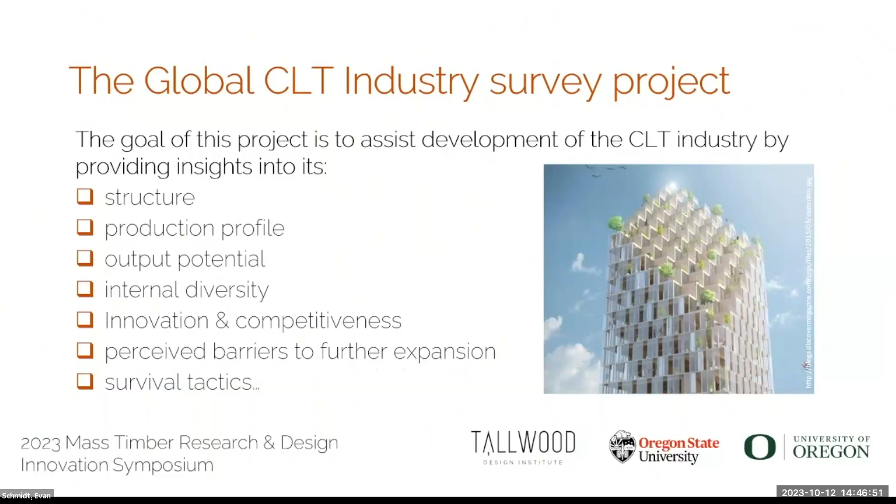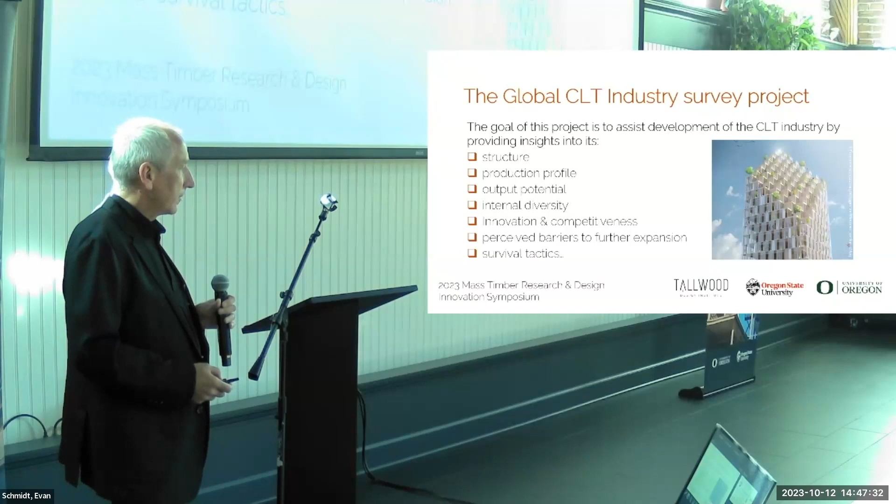Generally, we believe one of the best services we can do for our local North American mass timber panel industry is to look elsewhere—not only Central Europe, where all of this started, but also other developing markets—and see how they cope with challenges. This is an important context to everything discussed here before, because this is the industry that produces all of these panels and buildings, and essentially develops and collaborates with you on new exciting stuff and projects. So we collect all kinds of data, starting from industry gossip columns, trade journals, surveys, site visits, and we generate lots of data.

I'm not going to go through all of this here—it would take more than three times what I'm allowed. It's been funded; the TDI funding has been leveraged, and we've obtained funding from other sources as well, at times in kind, just travel money, at times other stuff.

I hope this is visible—oh goodness, not enough light in here. What you should see is, in gray, just contours of continents that you don't see. I leave it to your imagination.

We roughly divide the world into CLT producing regions. This is because not all companies wish to be singled out by saying this company produces that much. If we aggregate this data by region, it's much easier for them to share data with us, and that way we have a blanket policy—we never trace the data, and we never present it in any form that can be traced to an individual company.

As you can see, we have Central Europe separated from the rest of Europe, because Central Europe is the epicenter—about 80% by volume of CLT is produced there, or rather projects, because all CLT is produced for specific projects. It's a specialty product, not a commodity, okay?

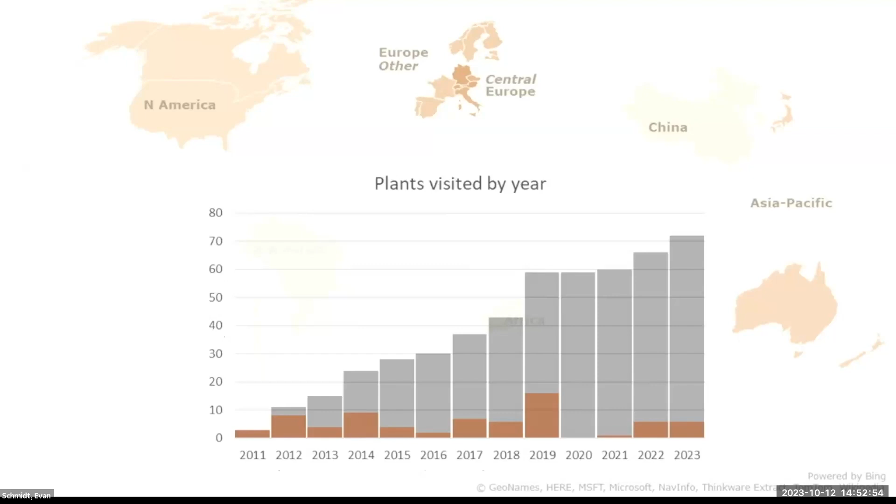The construction sector has boomed during Corona, and this benefited many of these companies. Those companies that planned expansion over what we now know as the pandemic period carried on and actually expanded the capacity, not necessarily the production. There were no signs of panic in the mass timber production sector, but there were also raw material shortages and pricing hikes. Logistics woes, experienced as much as with any other sectors in the economy. Workforce instability, production slows. All of this, depending where you ask, resulted in different impact.

Just as the industry itself is super diverse, it's still a very young industry. If somebody tells you that this is a mature product, a mature industry, don't believe that. Everything is still to be decided in the future, right? We are contributing to the development of this very new thing. And the same diversity is being seen in the response to the pandemic and to the alignment to the new normal.

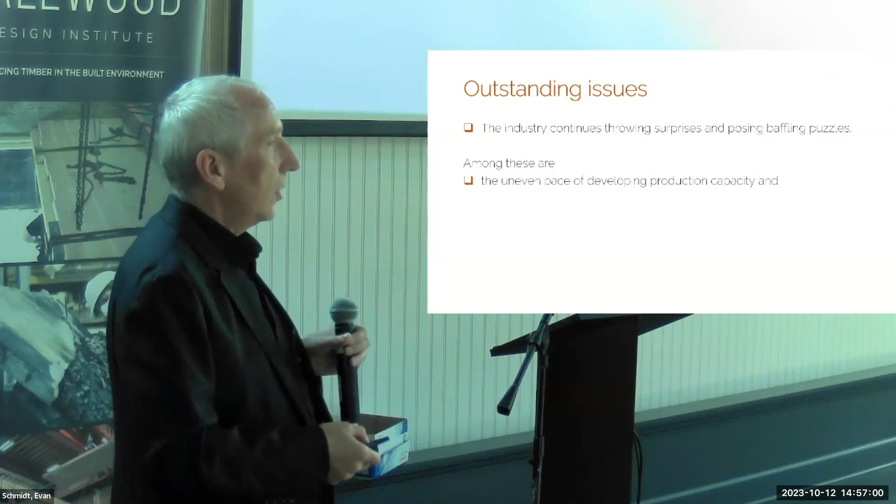So one of the surprises, the uneven pace of developing. We think that as we have Central Europe for a model, it should be much easier for us to develop this volume quickly. It is not. It is not, for various reasons. I'm going to touch on it with the other projects that I'm going to overview.

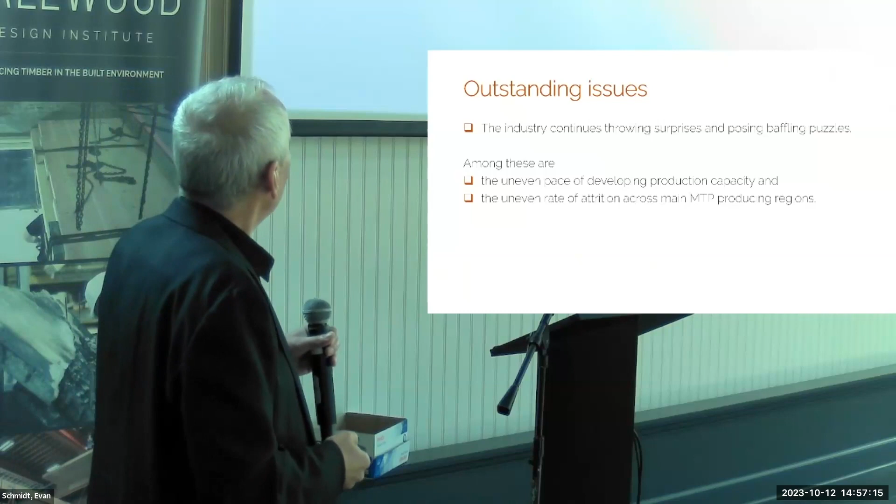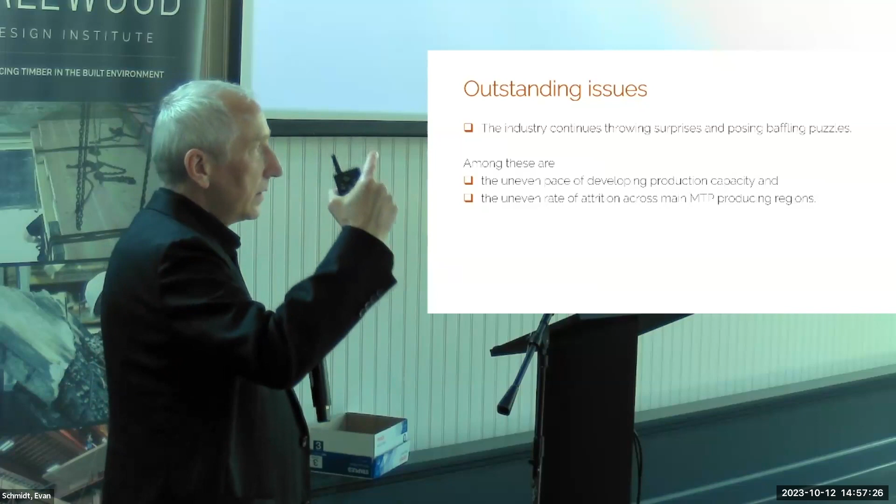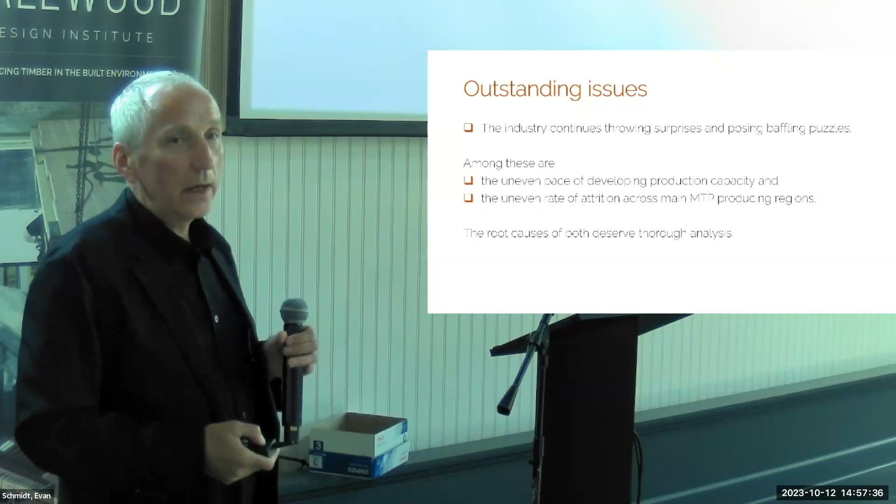The uneven rate of attrition across the region. I mean, attrition does happen. In all regions, we've seen companies being closed, but none at such pace as we have seen in the last 3 years in North America. What are the reasons? Hard to say. Is coronavirus to blame? Hard to say. The root causes would need to be analyzed, and this is a potential project for TDI.

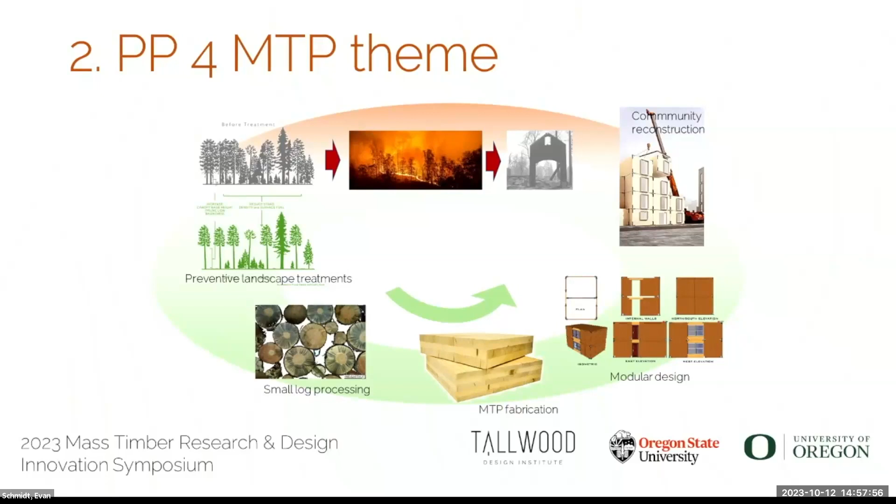Project number 2 is actually a group of projects utilizing underutilized species, particularly small logs, in structural mass timber panels. The general idea would be just to reverse this bad cycle. Again, I leave it to your imagination. It should be like a green arrow showing the good cycle below.

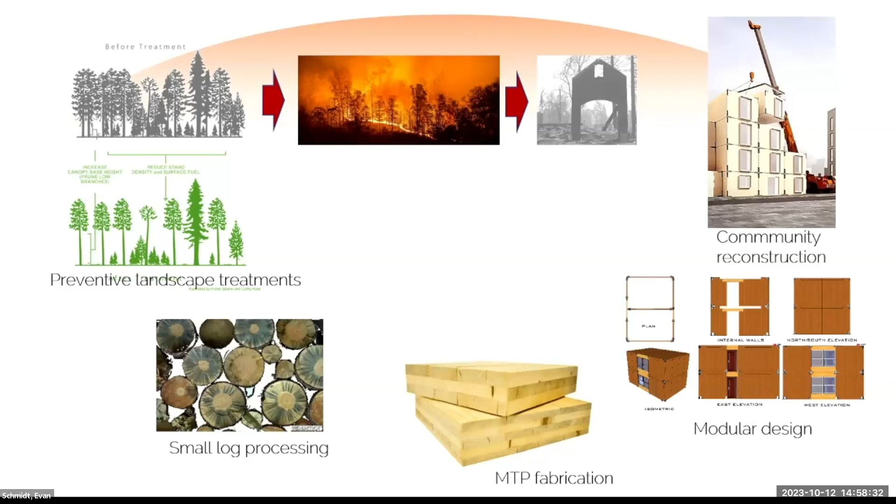So instead of letting the small logs burn in dramatic forest fires, we would like to harvest them selectively, and use them in CLT in modular projects. Perhaps these are not going to be good enough for tall wood buildings, but for small, low-rise modular projects, it should be just fine. We are making quite good progress with this project. Oh, here was the green arrow.

I'm going to touch on 2 projects that are inheriting from the series conducted before, much of this on TDI grants. In one of these recent projects, this one funded by USDA, not TDI, Sina Jahedi found out that the modulus of elasticity of lumber sawn from the small logs, judging by their visual grades, does not meet NDS specs for Western woods, which is maybe alarming, right?

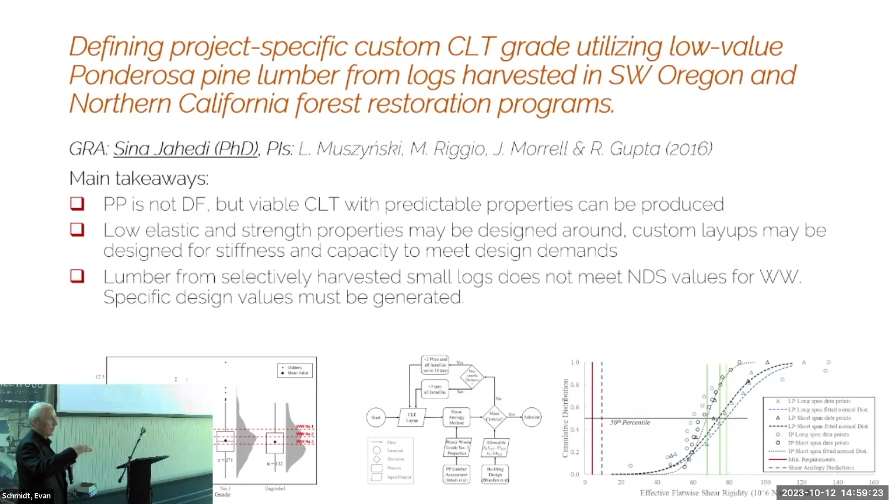But then you need to understand it's the same wood that we have from regular clearing. The thing is that the NDS values have been developed based on commercial harvesting, where everything goes, and where small logs make a small percentage. Now, if you are doing selective harvesting, you're targeting small logs. So the predominant volume of what you are testing is lumber sawn from juvenile wood, and these do not make the NDS specs.

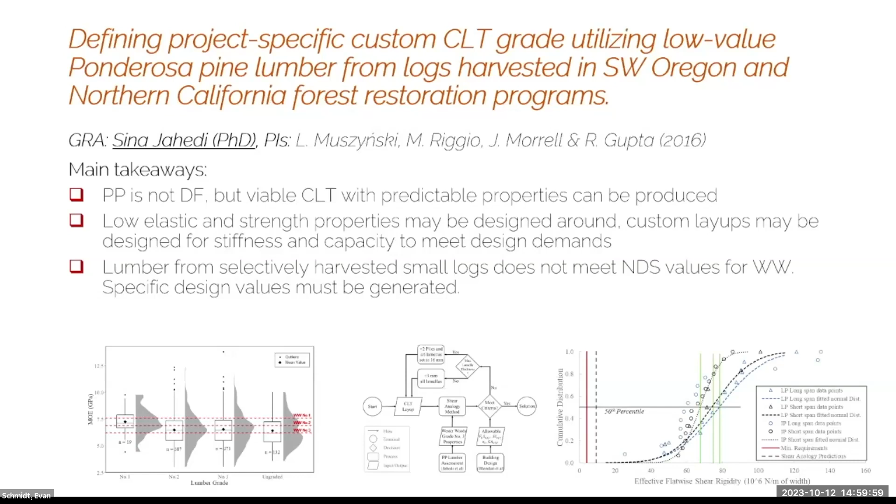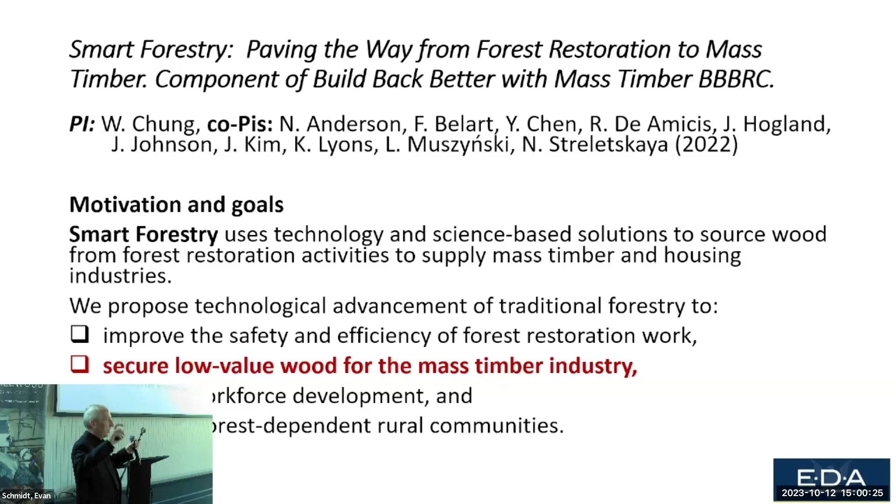So what are the solutions? You either just forget using them in structural projects, or, and this is one of the objectives of one of the subtasks in this big project, you can try to find ways of moving this lumber into the structural domain. This would be either by establishing the NDS values for this species, or changing the visual grading rules, or things yet to be determined.

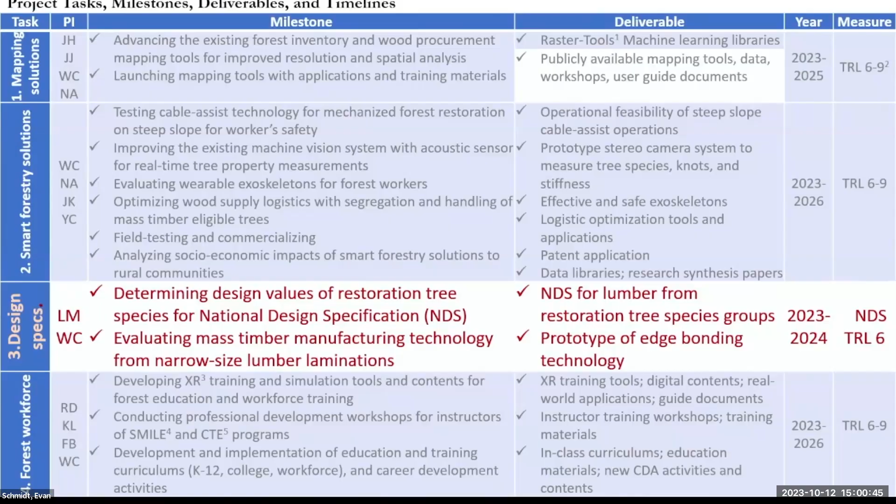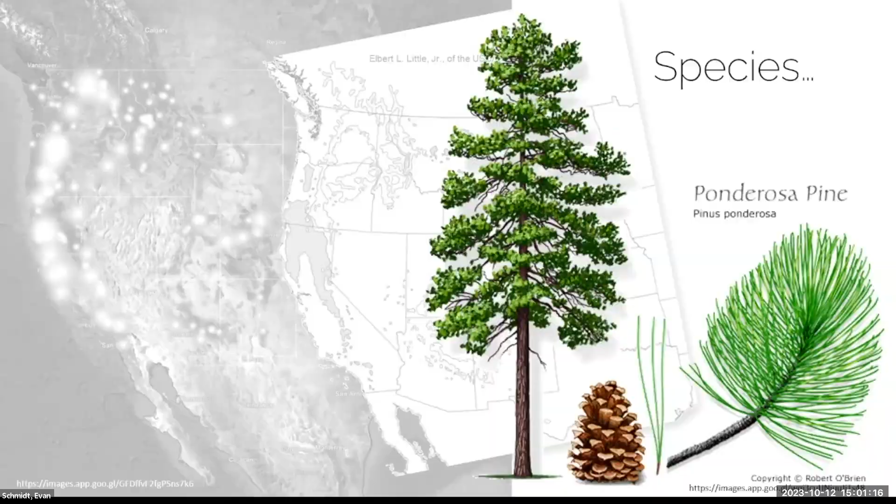Why do we fixate on ponderosa pine? It is just the poster child of most of the species that are being considered a problem here. There's nothing wrong with ponderosa pine in general, but it's the smallness of the logs and the limitations of what you can cut from round logs for lumber. So the idea here is to focus on the stuff that is being removed. In commercial logging, all of these trees would go. In selective logging, most of the stand would stay, and a small portion is being logged.

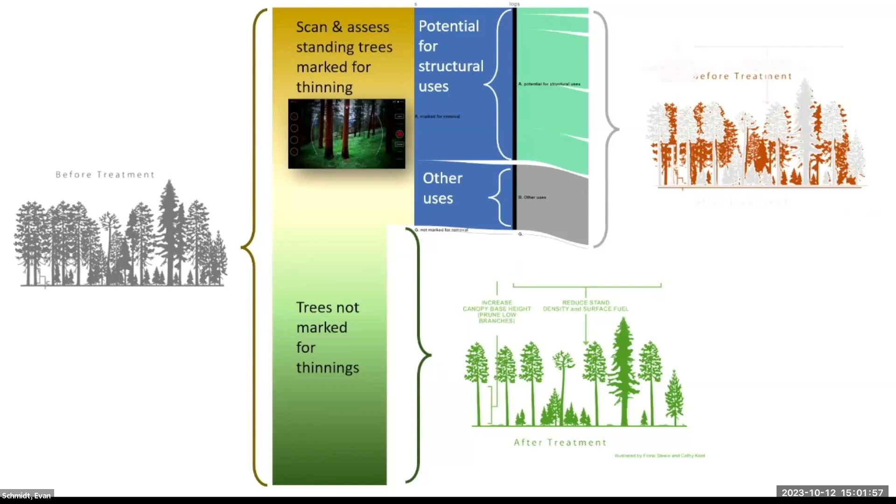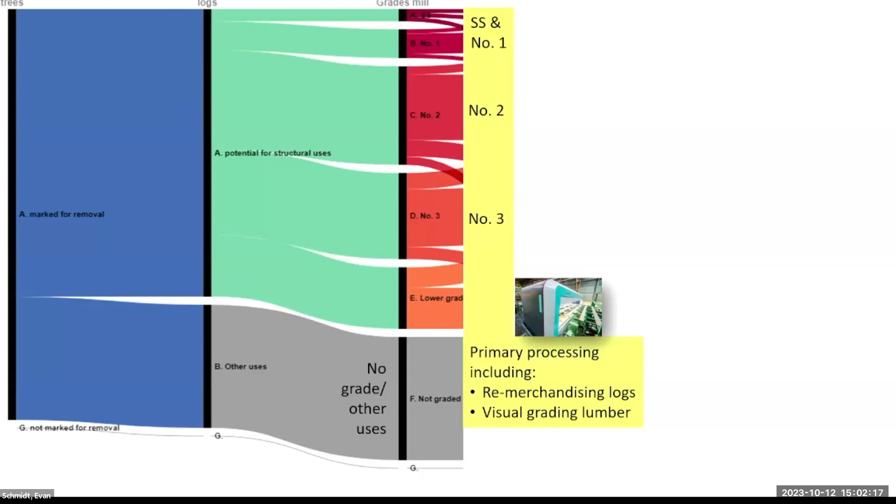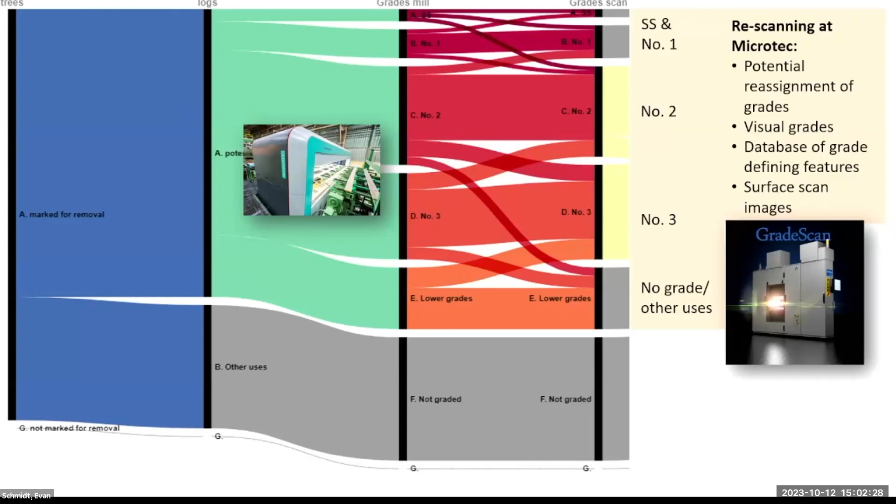They are being assessed on the site for any potential for structural uses. Then at the sawmill, I'm blowing it up for easier perception, they are being graded at the log yard first, then after being sawn. We have an idea that we can confront this with an advanced technique of visual grading in collaboration with Microtec. And then once this is done, number 2 and number 3, which are of interest for mass timber panels, would be tested for properties.

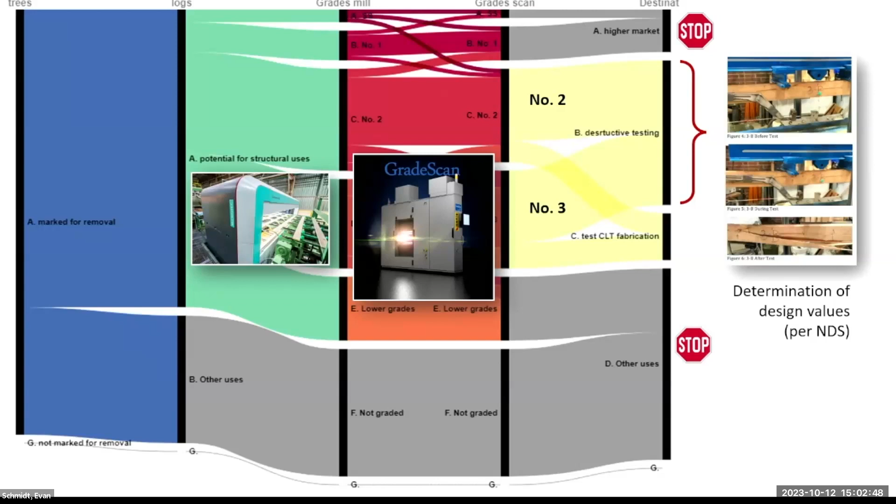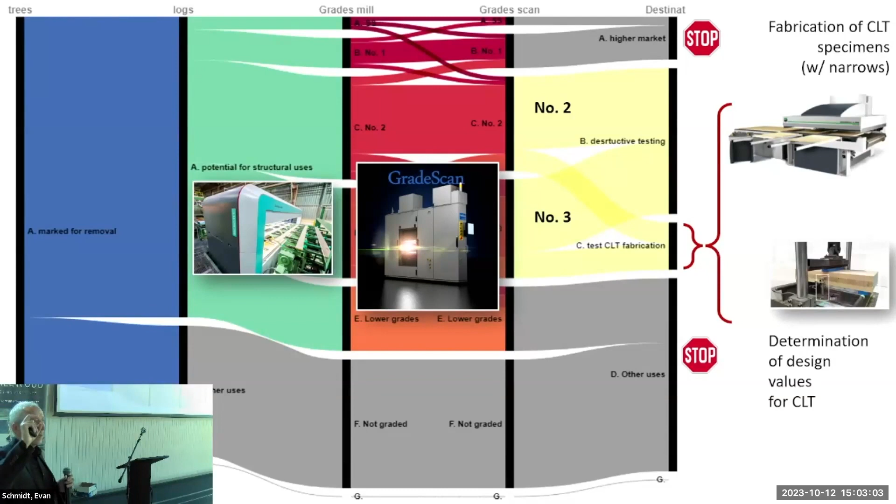And we will see now with also destructive testing how the values compare to the NDS values, and think of necessary actions after that. We are also thinking that once we are sawing the small logs, it may be economically viable to just saw for thin stock, thin and narrows.

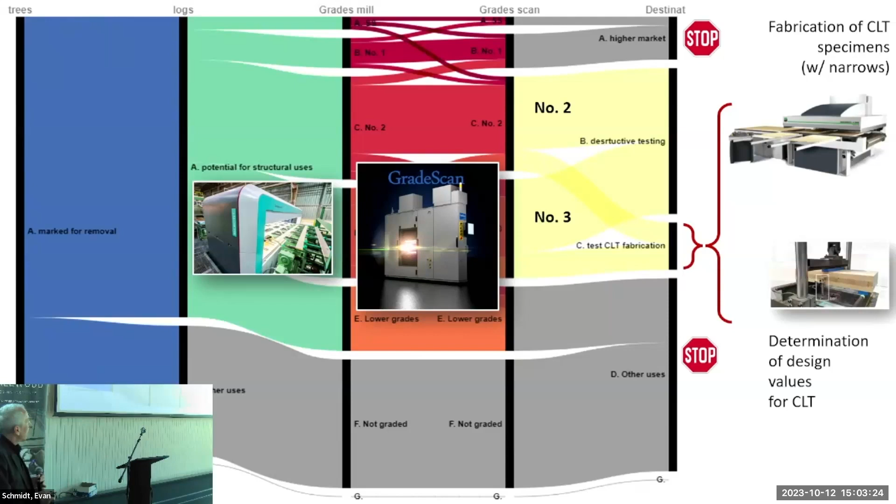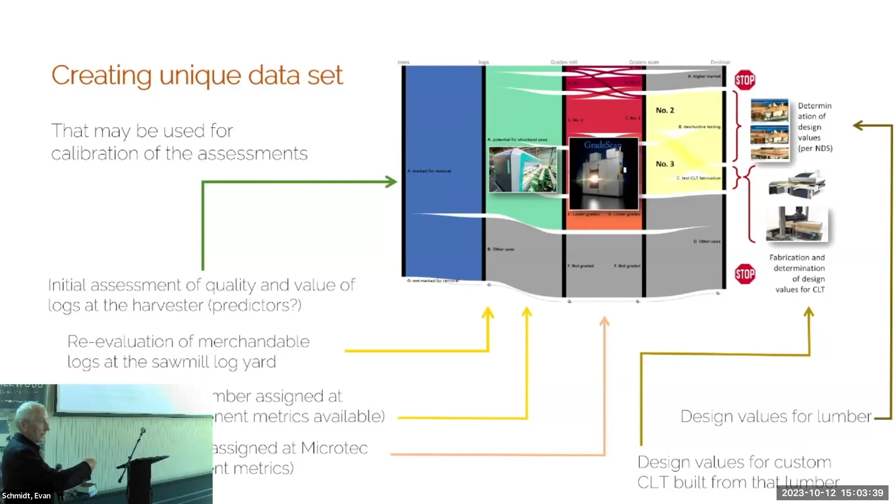Now, these are a headache to handle in the manufacturing process. So we were thinking of edge bonding this stock into wider, easier to handle laminations. So this is another area. In the process, we hope to develop a unique database which will connect the first assessment of the quality of the log with the assessment of the quality at the sawmill, then advanced assessment with Microtec scanners, and then actual data taken from empirical testing.

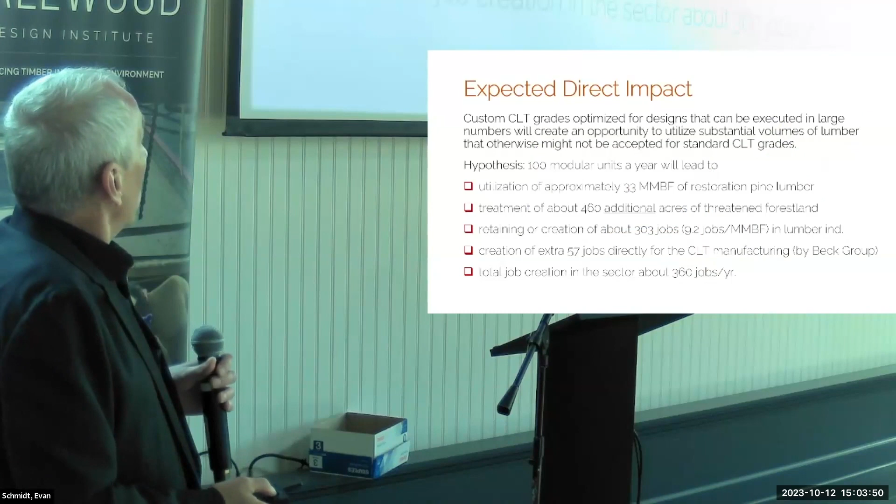This is expected direct impact. I think I'll spare you this thing. Number 3, back to fundamentals. How much time? 3 minutes.

Okay. Back to fundamentals. There are barriers when we think about the rate of adoption for the industry here in North America. There are a couple of things that come to mind. We have the strictest product standard, particularly the delamination requirement for the panels, stricter than anywhere in the world. There are some other things regarding the environmental and business environment in here, but here we are going to attack just the thickness tolerance and related stuff.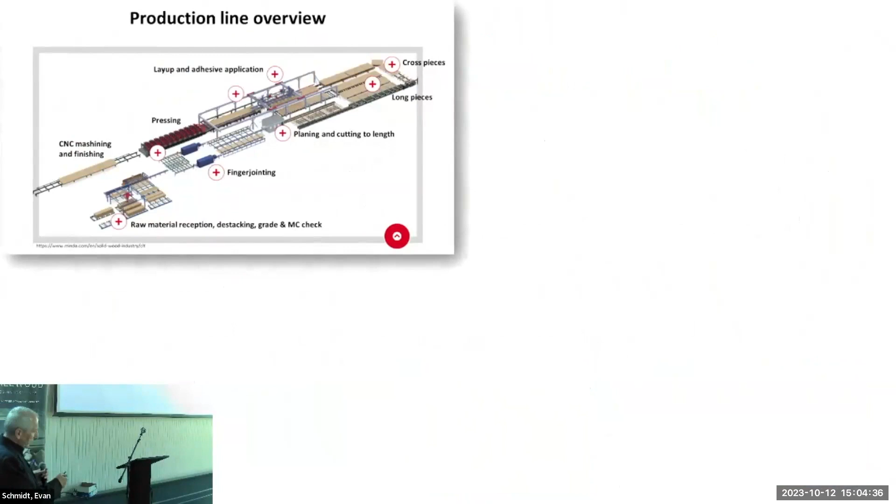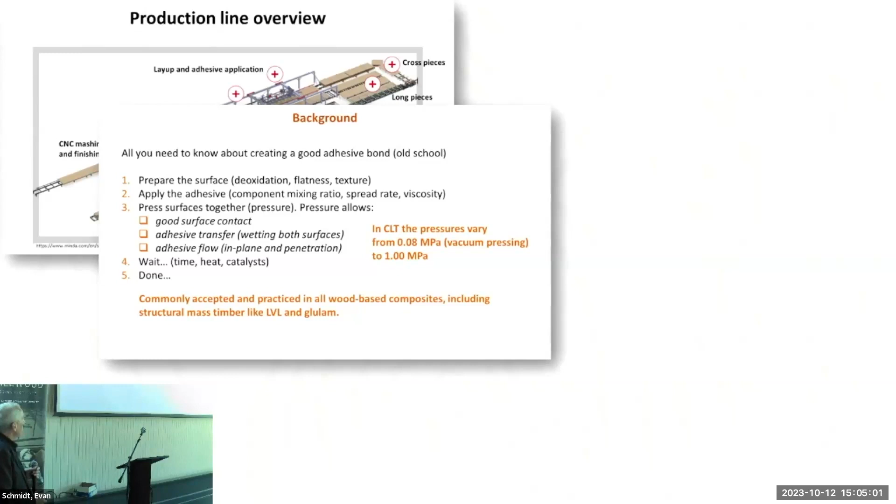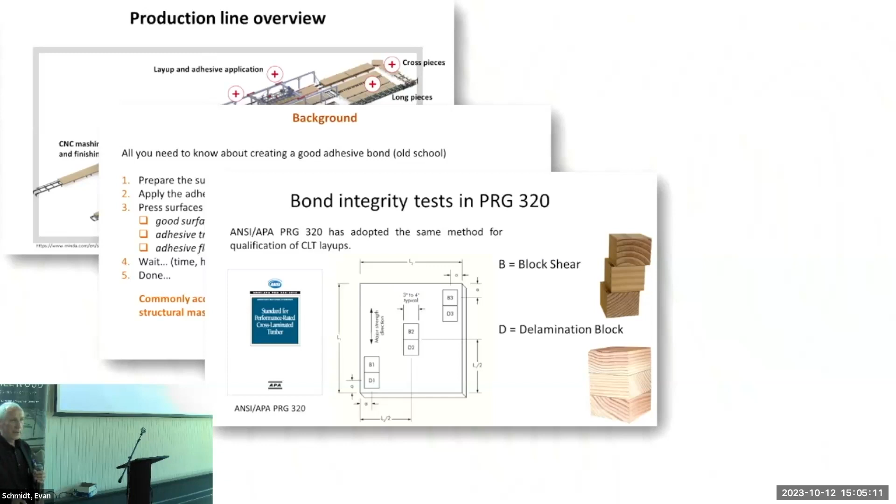So when you produce a panel, the important part of this is how you bond the layers together, okay? And there should be no surprises. This is age-old knowledge, how to make a good bond, right? You need to have plane, fresh surfaces, spread adhesive properly, have good pressure, have the adhesive cured, right? And once it's all done, you can just test for quality. And in North America, we have 2 mandatory standards, block shear and the delamination block. Of these 2, the delamination is considered to be a challenge. Whatever could go wrong, right?

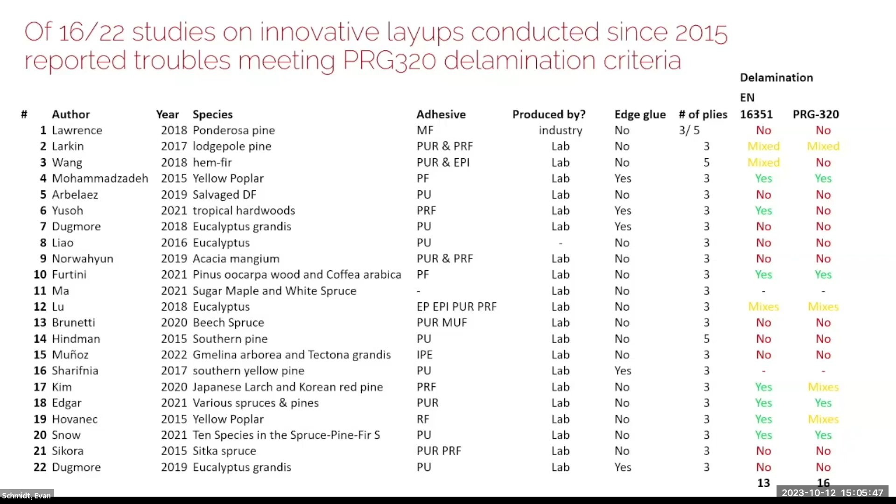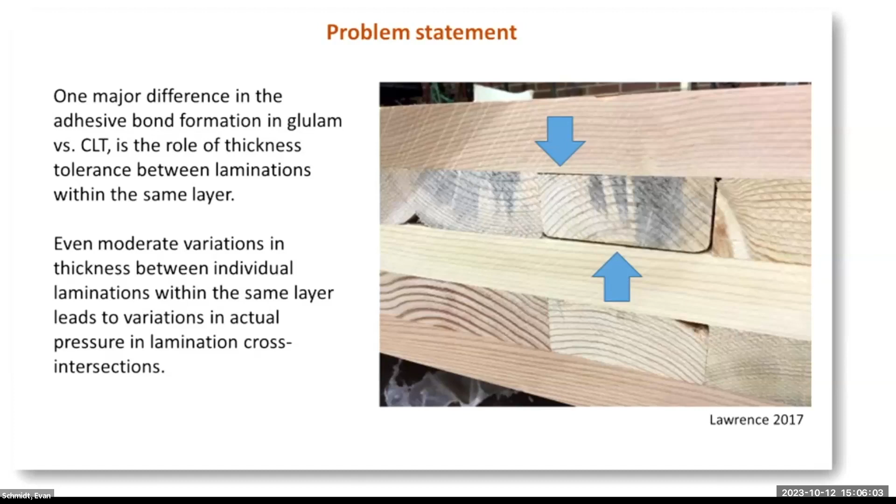And yet, if you look at the literature that Sina put together, and the research is important because it translates to the innovativeness of the market, right? Most of the research has problems with the delamination. Because they don't produce the samples on the production lines, but prototypes, shop made or a pilot plant and so on. They think that it's difficult to replicate, and it kills lots of promising prototypes, okay? So let's take a look at it. Things happen also in commercial manufacturing. This is one of the panels that we got from one of our anonymous donors, right? You see thickness tolerance seems to be a problem in here.

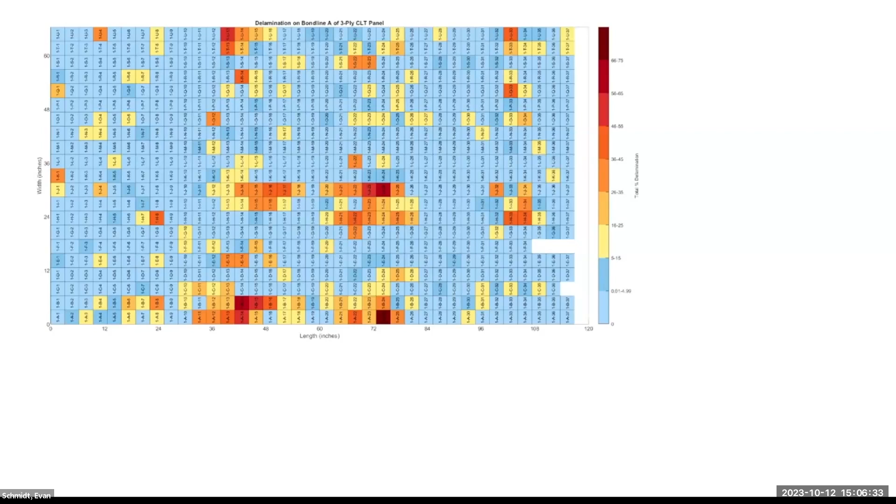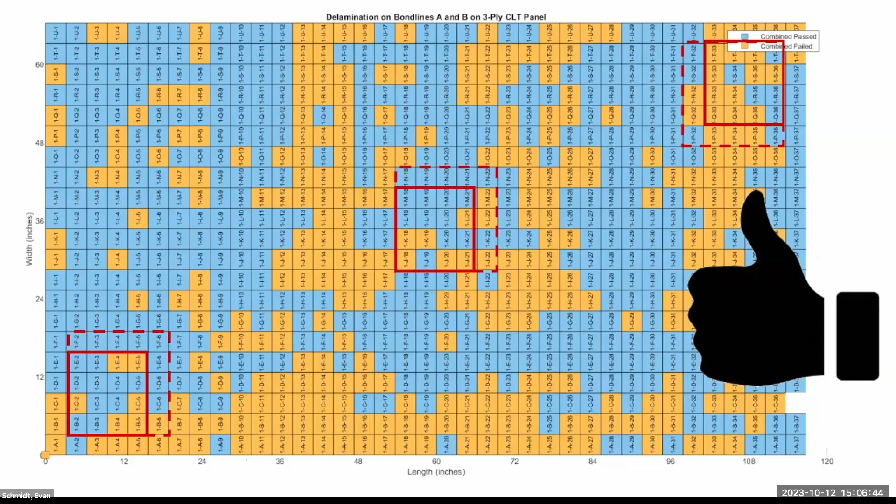So one of the problems is how do you sample, right? You are allowed to sample depending on the size of your panel. If this is a prototype, it's very small, you have very little wiggle room. If this is a large panel, you have a lot of wiggle room where to source your specimens for the delamination. So if you cut the entire panel into delamination blocks and do the delamination test exclusively, this is what we find. Delamination everywhere. And yet, this panel would be qualified as passing. This is because you can eliminate from the delamination samples some that have knots or edge gaps and so on, right? And there's also a little bit of gaming in here.

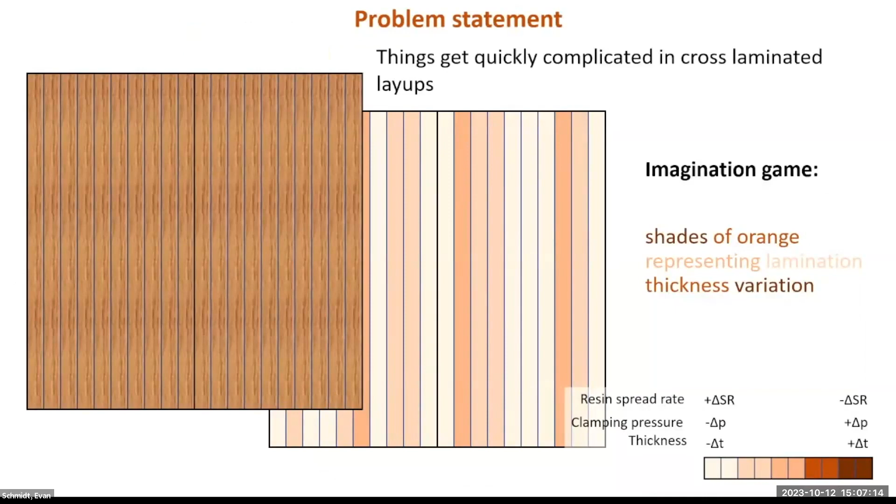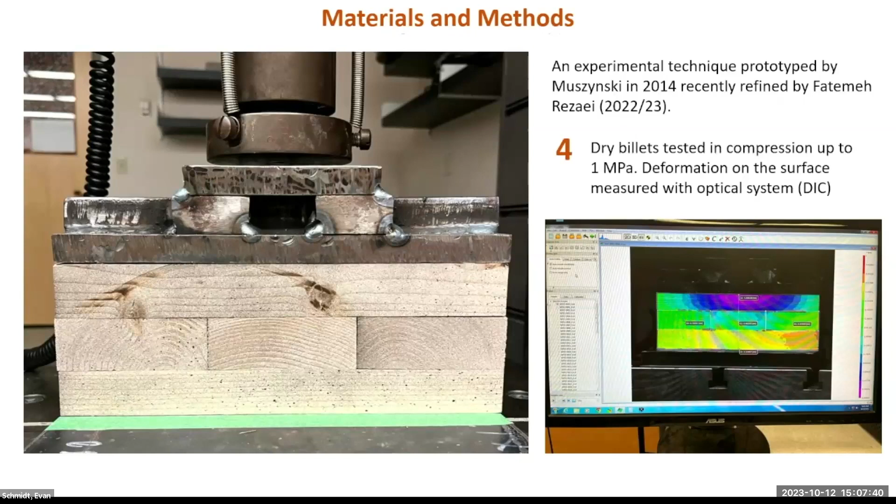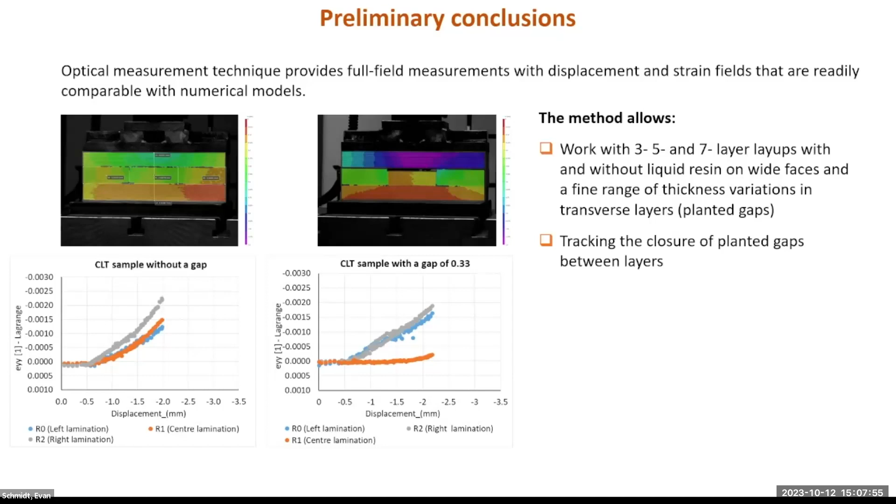But I don't think that the edge bond or knot is necessarily a problem. This is taken from some QA lab, right? And you see that the specimen was severely abused, but it's not the knot or the gap that produced the failure in here. We suspect that the thickness tolerance is the thing. And we have a project in the books that is going to find out how the load is being transferred from one layer to another, as you have the central block here a different thickness than the 2 on the sides. We are using optical methods to see how the load is being transferred. This is where all 3 blocks are closely matched. This is flagrantly unmatched, and we can see that this is what makes the central layer not engage at all, not show any strains. So we have a method.

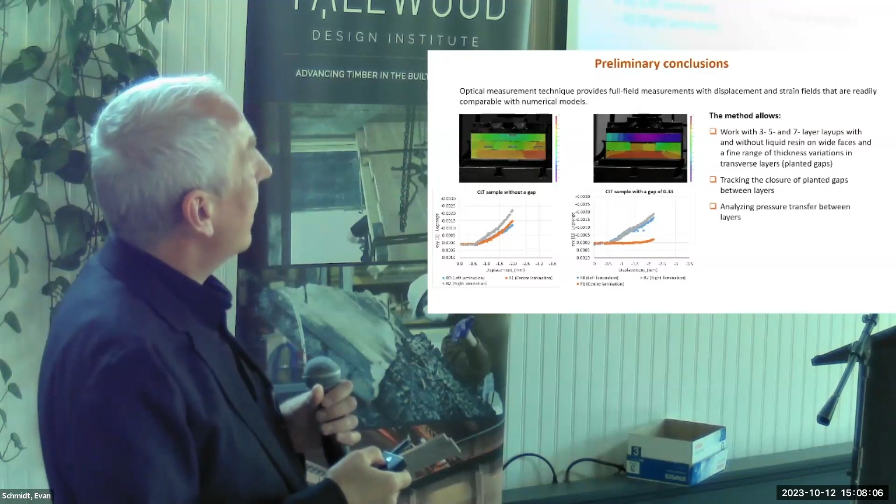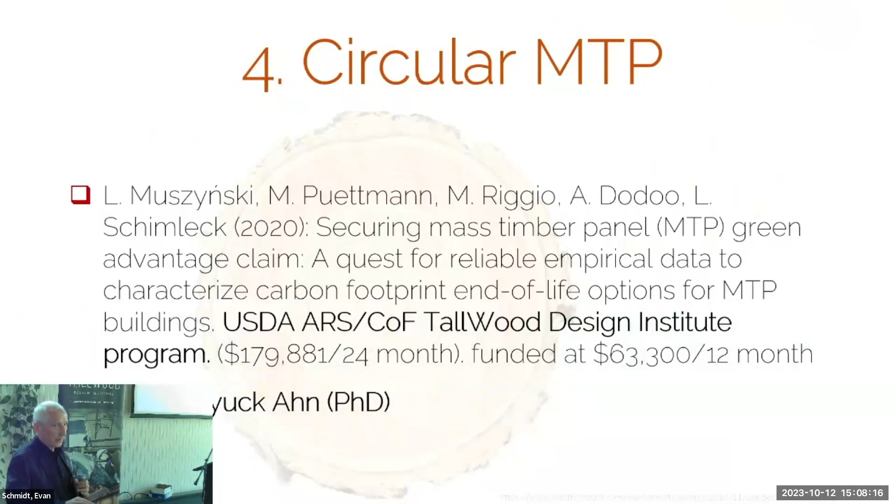This can be used with dry and resinated blocks, 3 and 5 and 7 layers, and we are hoping to develop some fundamental knowledge that should help us. I'm going to cut it at this point. Some fundamental knowledge that should guide the next revision of the PRG 320 and how we approach the QA and requirements for the product.

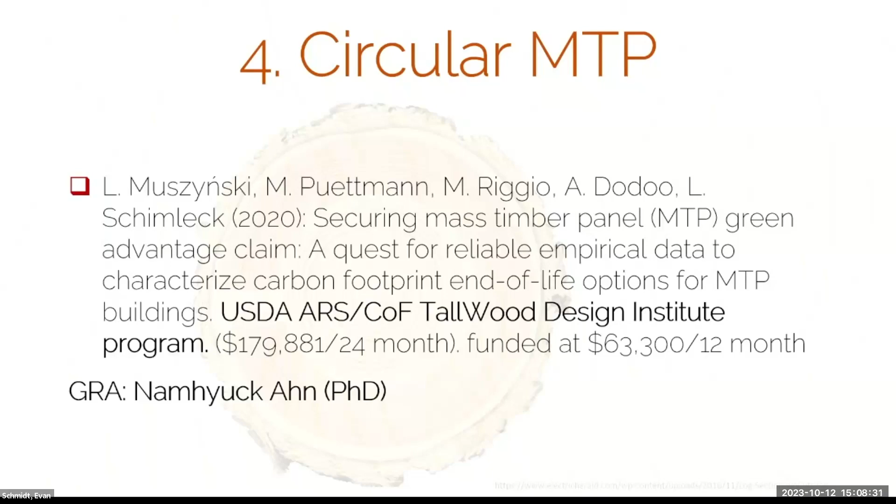I'm going to skip this one because Mariapaola is going to, I'm going to just zip through and get to the place. Let's see. Yes, this place where Mariapaola will have more on this topic.

One thing that I wanted to say about it is that we did LCA analysis on different scenarios for reusing the elements from deconstructed CLT projects. And what we found using current LCA models and the current LCA database is that nothing beats the landfill. Not even if you deconstruct and rebuild from the intact elements on the same site.

It's counterintuitive. We are as shocked as you are, but it speaks something either of the databases used by current LCA, and this is the work we've reported so far. Ari, Andre, Erica were speaking about feeding new data to the LCA models, or with the LCA assumptions, or perhaps with our general thinking or approach to how we construct CLT projects.

No pressure on me. I have a lot to tell you about what Lech skipped. Well, while we figure out if my PDF will work, yeah.

First of all, I am a faculty member in wood science and engineering at OSU. I teach and do research on wood design and architecture. I have an architecture and engineering background. And I will talk about integrated approaches for circular economy in mass timber construction. So it will be more like a high-level conversation about how we can incorporate circular economy in our mass timber buildings.

And circular economy is at this point a buzzword. I think everybody knows exactly what it is. It seems to be a very hot topic for the mass timber community, at least the research community. It was a huge topic in the recent World Conference of Timber Engineering in Oslo this last summer. And hopefully I will show something about it.

So we talk about these different strategies of circular economy. I learned a new word while I was preparing these slides: resile, that means being resilient. And the plot that is there, you cannot even see it.

So the first series of projects are really looking at the whole stages of a building life, from production, by using fewer resources, in this case underutilized wood species from forest thinning operations, and Lech just talked about it, so I'm not going to repeat it. And then with these new products, building something that can be built with the materials and can have a long life.

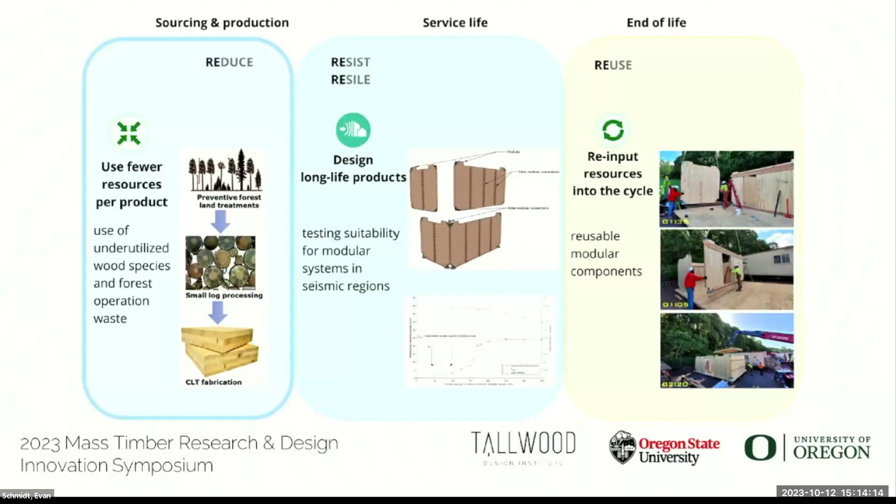So we were looking at modular systems and also testing their suitability for seismic regions. But we were also interested in how these modular buildings can be used in temporary buildings. This seems counterintuitive to the concept of a long service life. But if we do temporary buildings that can be reused, then this makes much more sense.

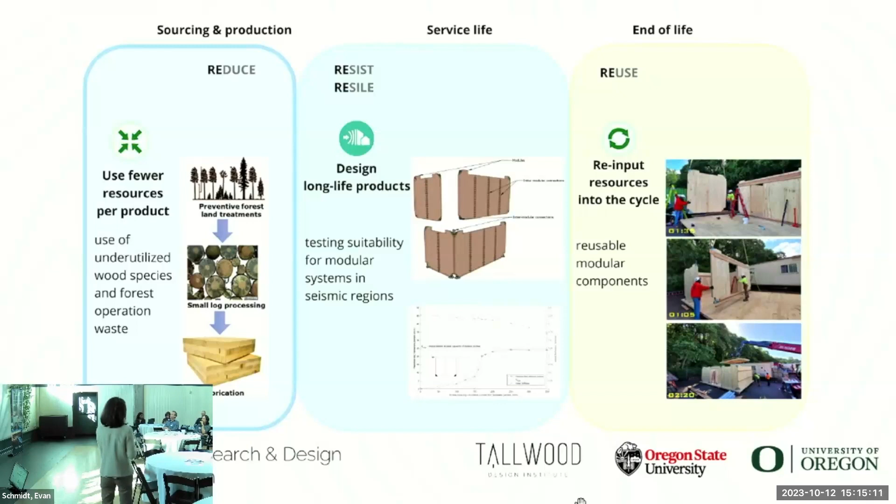So we prototyped, built and tested a full-scale modular unit here in Portland, and we built it, disassembled, built it again, and monitored it for a long period of time. We rebuilt it in one working day with 3 workers and no cranes, just very basic equipment, and that was very interesting.

Okay, so the first wood innovation project that Lech mentioned was funded 6 years ago, and then it was followed by this other wood innovation grant that looked specifically at ways to utilize ponderosa pine CLT in modular buildings. Lech was a co-PI, and Erica also collaborated on this project. We co-advised one of our graduate students, but really it was a big team.

And so the students worked synergistically on these two projects, from the material characterization to the testing at different scales, and the scales of the connections that in a modular system are very important, both the intramodular connections and the intermodular connections, so the connections that we use between the modular parts, because we were interested in a system that could be easily deployed, so fast assembly and disassembly.

We were interested also in using connection types that allowed this point type of connections provided by Rothoblaas. We had to characterize the behavior of these connections in this new material, and also verify the residual damage that could occur after multiple uses, or in case of cyclic loading. So we identified the intramodular screw spacing as a key parameter, for instance, for the reusability of the wall modules, and developed a methodology to design this modular system.

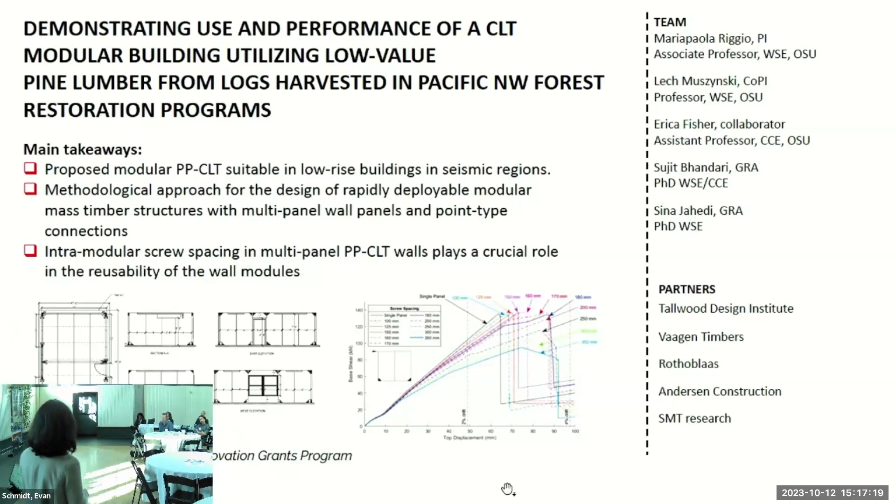Another series of projects looks at the two extremes of the building life span, so from production to end of life. And the focus is on using material from deconstruction projects, or reusing mass timber panels, or even manufacturing waste, so-called remnants or offcuts from mass timber panel manufacturing. And we have two projects that looked at what are the criteria to have a successful deconstruction, and what is even the feasibility of deconstructing mass timber systems, and then new designs for waste materials. So I will quickly go through.

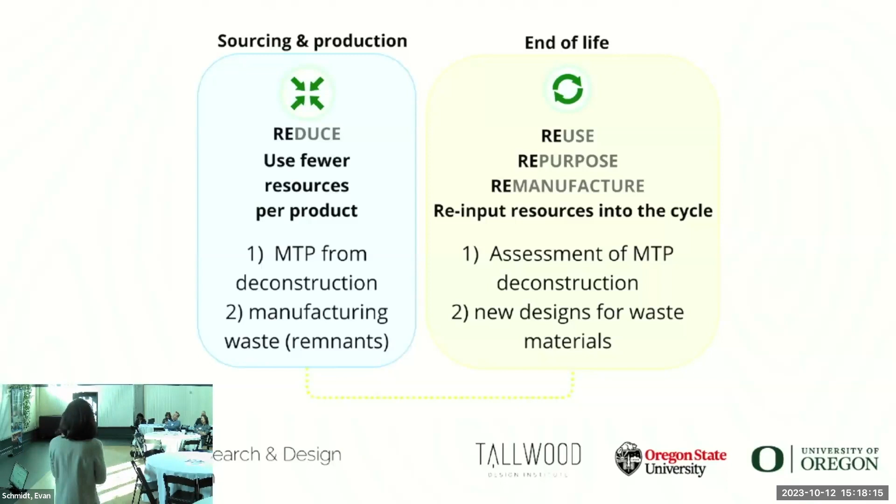The first one, you recognize the ELLI project, the 3-story building that has been built and tested in our Emmerson lab. And we also did some observations of the deconstruction process, and we were interested in acquiring quantitative data regarding the deconstruction process. We are aware that this is a test structure, so not exactly what a real building will be. There are a lot of differences. This was a structure where lessons were learned while doing. So hopefully in a real building, many of these things would be sorted out earlier.

And then also, this is just the structural system. No finishes, no building envelope, in a laboratory environment. Yet we were able to collect a lot of interesting data regarding the deconstruction process in terms of time, tasks, and sequence of activities, and also in terms of reusability, which is a word that needs some reflection. What does it mean? Reusing for the same function in a new building, or repurposing for new functions? Now we know that many parts of this building are going to be reused, but as non-structural parts.

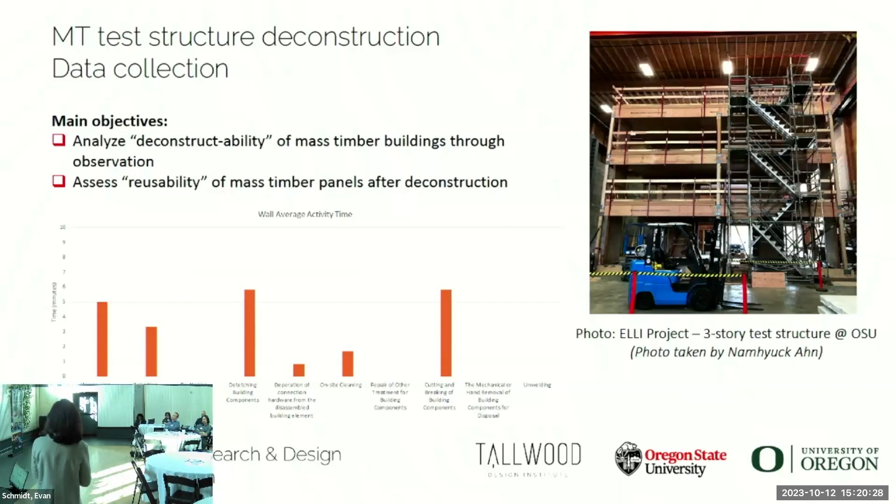And then we have a fun project that has been supported also by TDI through an ARS fund, a small grant, and involves our students. My colleagues emphasized the importance of the next generation of professionals, and we involve our students not only in research but also in our educational efforts in our classes. We engage them in different design tasks and collaborative tasks in this class, in which U of O architecture students and OSU wood science and engineering students work together to develop a design.

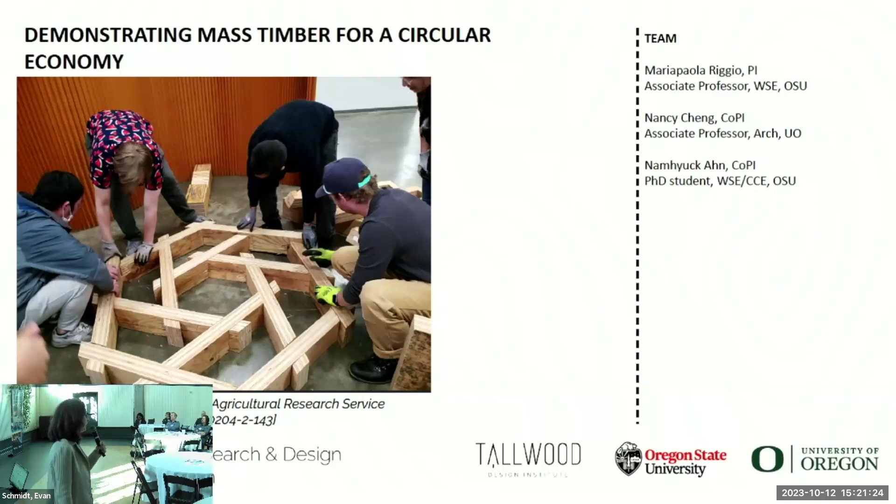And in this case, this is the second year that their challenge is to reuse materials, so mass timber remnants, to build reusable structures. So we ended up choosing reciprocal frames because they're fun, they're intriguing, and also because we were able to use smaller elements to potentially build larger spans, and also investigate the use of notched connections and different types of CNC digital fabrication techniques. So yeah, that is fun. And if any of you are interested in reviewing our next iterations of the projects, please come and provide your feedback.

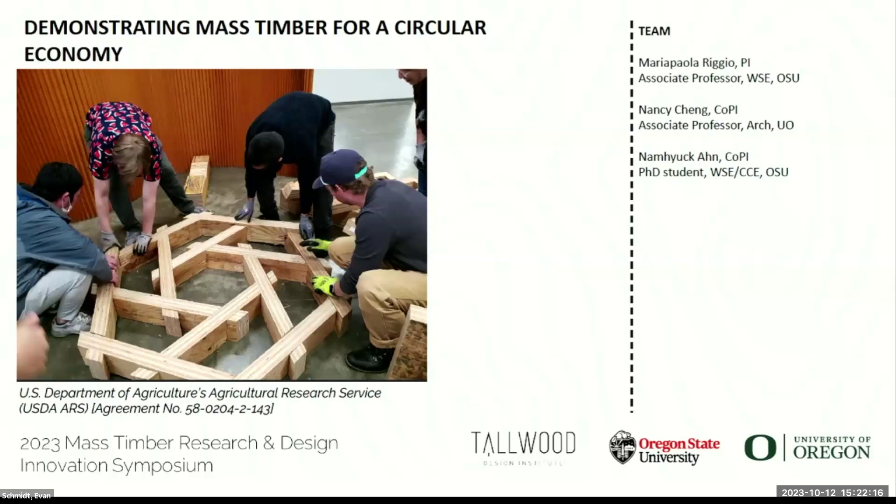Now, during the service life, we do need to care about our building and make sure that it lasts at least for the designed service life, hopefully longer.

So this is a big part of my research. We have started with monitoring our own Peavy Hall, the Forest Science Center complex in Corvallis. We have installed only 350 sensors, not 800 as Andre is planning for the new 6-story building, and it's already a lot because these 350 sensors have been installed already 5 years ago.

So Evan was the first to put in sensors in the first erected CLT walls. And so we have plenty of data.

We have started with analyzing data during construction, moisture behavior, and then we provided early feedback to the construction crew regarding post-tension losses in the post-tension rocking shear walls. And we are still investigating effects of sustained loads, so basically creep and varying climate conditions.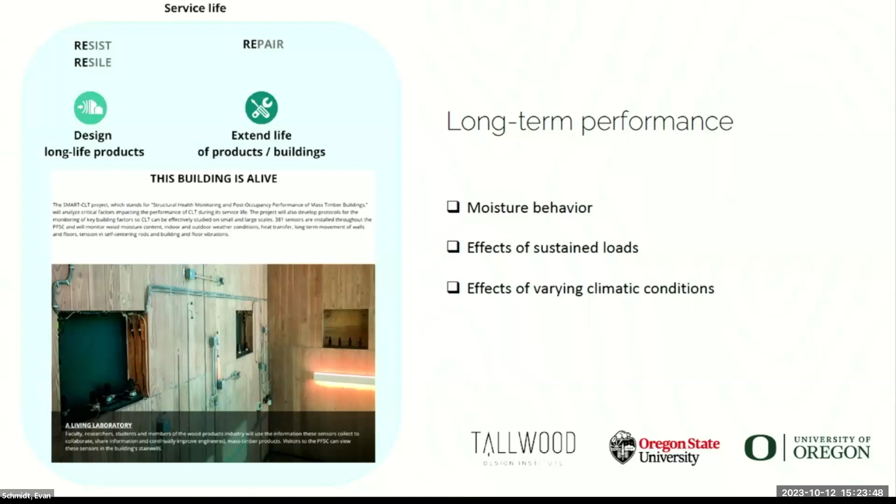So there are a couple of other projects on creep, and this is so the idea of identifying and evaluating the long-term performance of these components brought then to another project in which we are trying to connect.

And unfortunately, you can see part of the slide, it's very bright. But basically, from the building scale to the system scale, we built and tested for 1 year two mass timber post-tension shear walls, one MPP and one CLT, in the Emmerson lab. And then we also tested at the smaller scale post-tension panels in different environments, constant environments and cycling environments.

to characterize both the viscoelastic component and the mechanosorptive component of creep that is also affected by cyclic changes of humidity.

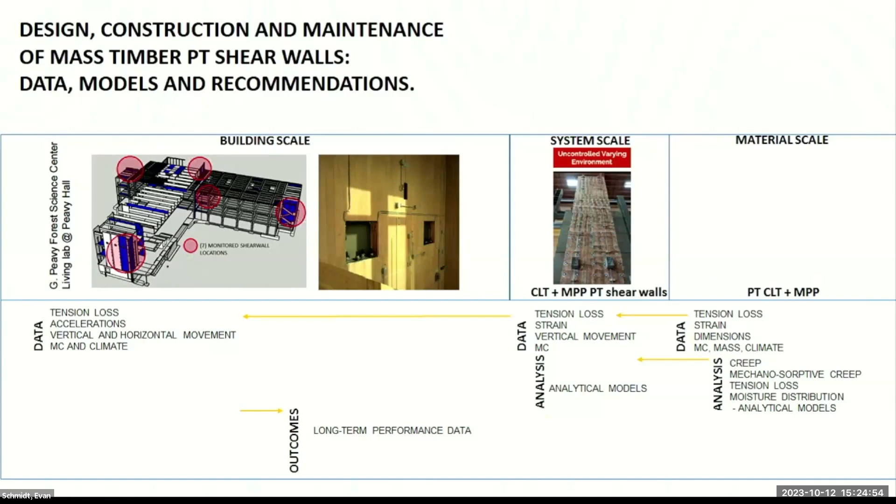We have some preliminary results. We have experimental data, a unique set of data, I would say. I think we did a good job in our experimental design, because we had a 1-year-long COVID year where we couldn't access the lab, so we could do our work of planning the experiment of shrinkage and swelling and viscoelastic and mechanosorptive creep and post-tension losses.

And then we have validated our model to predict creep. And we have also noticed some different behavior between CLT and MPP. For instance, CLT experiences more viscoelastic creep, while MPP seems to be more dimensionally sensitive to changes in moisture content.

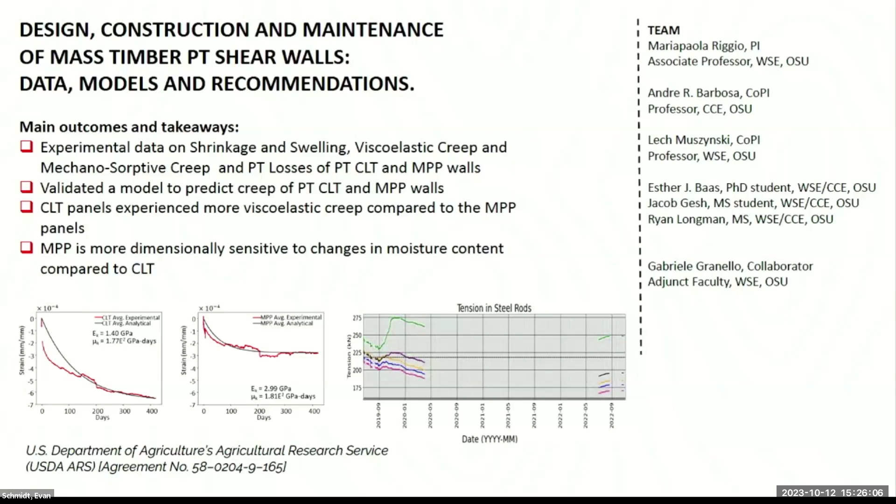But there is still a lot to analyze, so these are still preliminary data. Our intention is then to go back to the building and try to understand causes, for instance, of the tension losses that are still occurring in the shear walls.

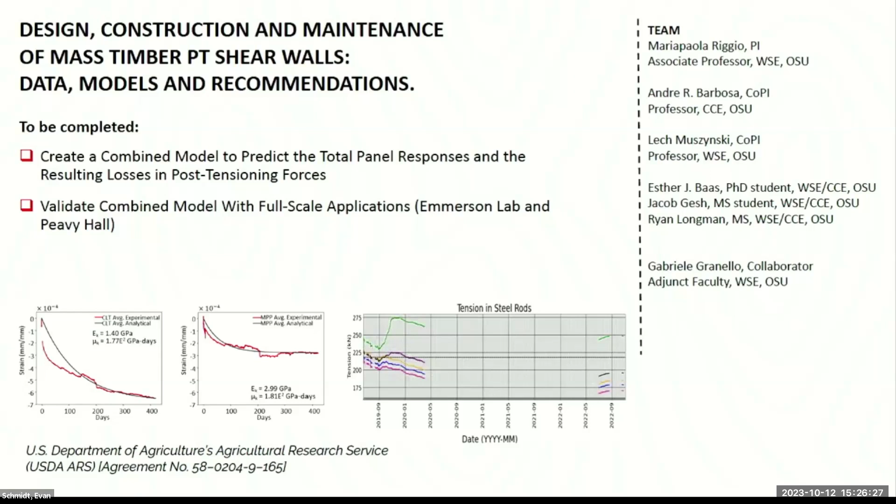So we want to create a combined model to predict the total panel responses and the resulting losses in the post-tensioning forces, and then validate the combined model with full-scale applications, both of the full-scale walls in the Emmerson lab and in the building.

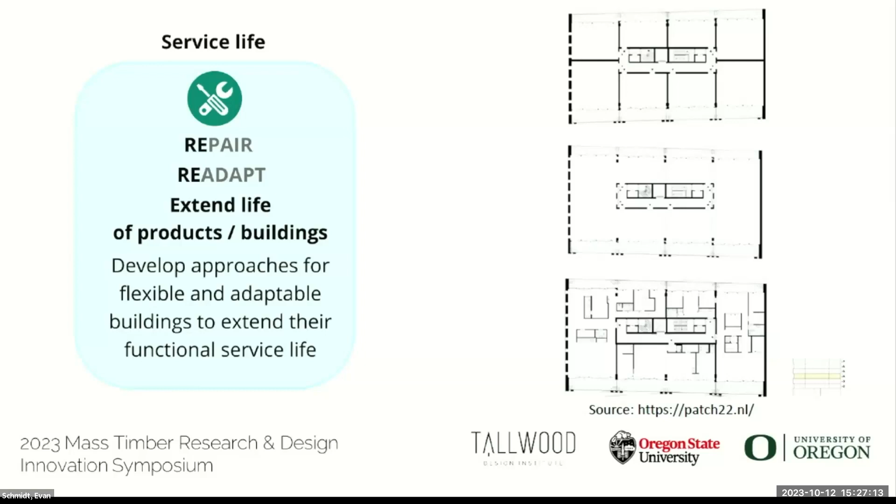We have also, so this is a project with one of my grad students in which we are looking at extending the life also in terms of functional life, because in many buildings, not just mass timber buildings, even if the physical durability is fine, I mean the building is still in perfect condition, but it is demolished because it's not functional any longer. So we are looking also at functional longevity and seeing how we can develop designs that can be adaptable and flexible over time. And we think that mass timber is a great candidate for this.

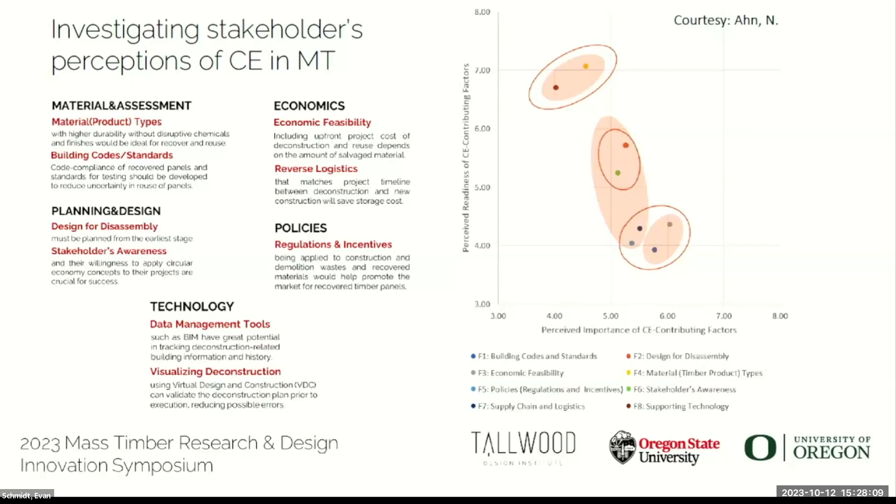So we are still interested in learning about what you think are also our priorities in terms of research. What do you think can be the most important direction for our research? And so I encourage all of you, it's just one question, it will take you 1 minute at most to respond to. Please help us identify critical areas for circular economy informed mass timber buildings. There are a few, not all possible strategies, but we are very curious to know what you think. So I'm ending with this, and then I hope there will be more conversation during the break.